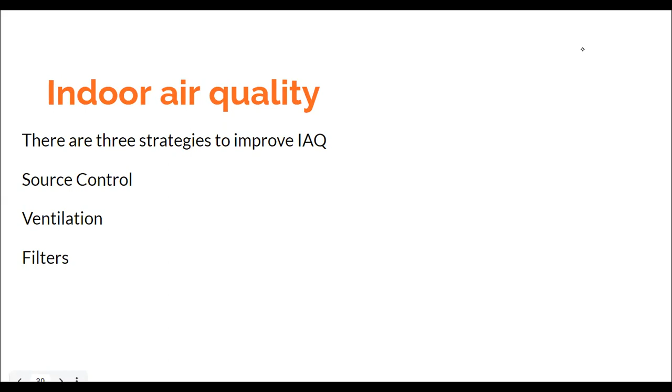So the major intervention in improving indoor air quality is what is known as source control. This is the most effective way to improve indoor air quality, and this is done by eliminating the individual sources of pollution or by reducing the emissions from those sources. For example, asbestos can be sealed or enclosed. And if there are some stores which emit gases, they could be simply shifted to some other place. So the sources are enclosed or separated from the other environment, and that does reduce the requirement of diluting the indoor air.

So the most important aspect in indoor air quality control is you need to identify the source of contamination and you need to control it so that the need for other methods of improving indoor air quality is minimized.

Some examples could be, for example, if there is a moisture source through roof leaks or there is rain penetrating through the leaky windows, and this kind of source control has to be done before attempting the other intervention method to improve the indoor air quality.

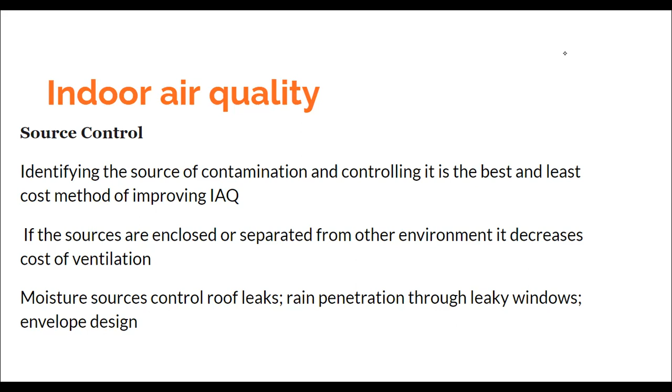Let us now discuss the other and the most important method for improving the indoor air quality, and that is ventilation. What is ventilation? Ventilation is the deliberate attempt to supply fresh outdoor air inside the room or inside the space whose quality is to be controlled. So the entire idea is to dilute the indoor air to a level of acceptable indoor air quality.

Now, what is the assumption in this? The assumption is that the outdoor air is more fresh, the outdoor air is less polluted, and when you send that outdoor air, the fresh air, inside the room, the quality of the room would increase. So this is the idea of diluting the indoor air.

This method, that is the indoor air quality control through minimum ventilation requirement, is recommended when there are mechanical systems like HVAC systems put in place, but it can also be utilized in some passive systems, like just by simply opening the doors and windows or having ventilators at your homes. Even if there is no HVAC system, one can make sure that there is improvement in the indoor air quality. But all this would depend upon the quality of the outdoor air.

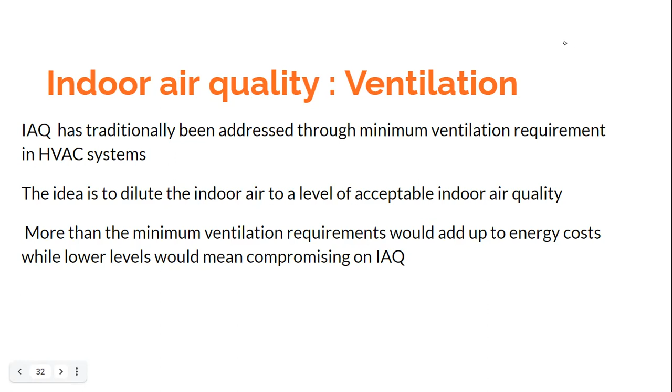So the optimum has to be worked out as to what is the ventilation requirement to make sure that the indoor air quality to the acceptable standards is maintained. Now, how do you get what the standard is, and how much is the minimum ventilation standard? For that, we need to refer to some professional organizational standards like ASHRAE standard 62.1. In the building codes, there is a table which lists the minimum ventilation standards.

ASHRAE standard 62.1 can be purchased from ASHRAE, and there are other standards which different countries, especially the HVAC professional organizations, adopt, and one can easily refer to those and decide upon the minimum ventilation standards so as to maintain the indoor air quality.

While this approach of keeping the ventilation standards to improve the indoor air quality is good, that is not enough. Both these methods, that is source control and minimum ventilation standards, are important, but they need to be complemented by what is known as the cleaning of the air by using filters. So filters are crucial to control the indoor air quality.

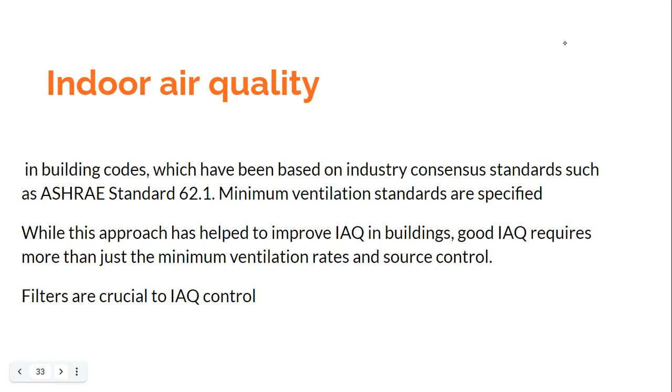As I said, the traditional means of dealing with the indoor air quality in HVAC systems is through ventilation with the outdoor air. And this approach assumes that the outside air is clean, it is not dirty. But if the outdoor air is dirty, if it's of poor quality, then insufficiently treated ventilation air actually would make the indoor air quality worse. So in that scenario, what needs to be done?

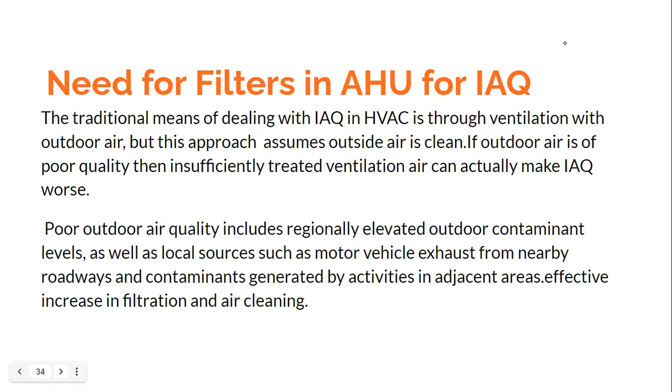And why is the outdoor air quality poor? The poor outdoor air quality is because of vehicular pollution. Internal combustion engines emit flue gases from the tailpipes, and that would cause the pollution, the contaminants. And then there could be some contaminants generated by activities in the adjacent areas. So what is needed is we need to have filters in the air handling units of HVAC systems for maintaining the indoor air quality.

Now, in order to know what are the best type of filters, we would be discussing the filters in quite detail, but this term we need to understand often comes very crucial. That term is the minimum efficiency reporting value, commonly known as MERV. M for minimum, E for efficiency, R for reporting, and V for value.

So what is this? This is a value which is used to describe the efficiency with which particulate filters remove particles of a specified size from an air stream. So in a way, it talks about the efficiency with which the filters remove the particulates. Higher the MERV value, better is the efficiency of removal of contaminants by the filter. So we need to go for higher values of MERV while choosing the filters if the contamination is more.

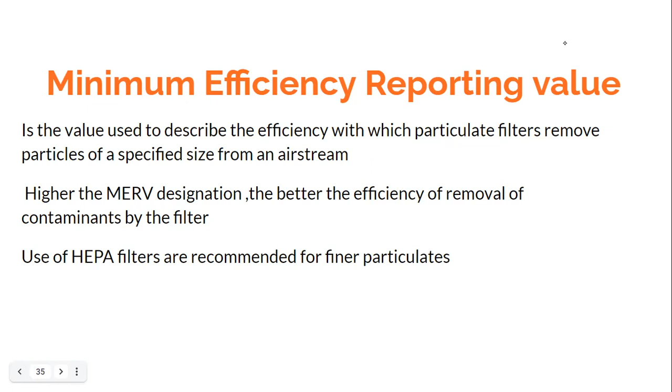For finer particles, one might go for HEPA filters. We had a discussion on the filters which are used in clean rooms, and the HEPA filters are one of the important filters which are used to maintain the indoor air quality.

These were the three methods. That is, you need to control the pollution at the source. Then we need to make sure that the ventilation is appropriate by seeing to it that the air changes are good. And the third we talked about is by use of filters.

Indoor air quality not considered during design and construction would cause many problems. So we need to incorporate the features of maintaining indoor air quality right from the design stage. Now, why is that so? Because the basic design decisions like site selection, orienting the building, locating the outdoor air intakes, designing the HVAC system and the ventilation, these are critical to maintain good indoor air quality.

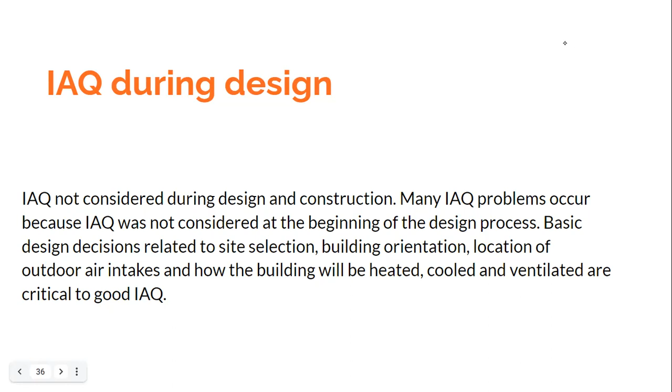If we take bad decisions regarding site selection or locating the outdoor air intakes, or by poorly designing the HVAC systems, then the indoor air quality would become costlier to maintain. It means that you need to put in more systems to clean the air, and that would be costlier. Not only the first cost would increase, but also the energy cost would increase.

Another important aspect regarding the indoor air quality is to make sure that the filters need to be operated and maintained efficiently. Because if you put the filters and the dirt accumulates, this dirt accumulation in the ventilation systems combined with poor management of water can lead to biological growth and serious indoor air quality problems.

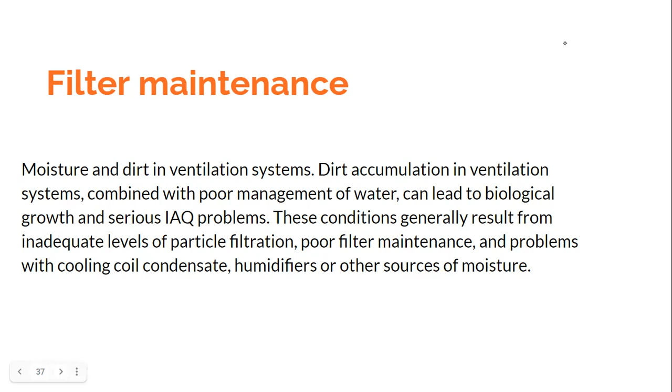These conditions generally result from inadequate levels of particulate filtration. This might happen because of poor filter maintenance, or problems with the cooling coil condensate, humidifiers or other sources of moisture. So moisture coupled with dirt becomes a dangerous combination, and we need to make sure that the filters are not clogged and are properly maintained so that the indoor air quality is at acceptable levels.

And finally, in the next class, we would be discussing a lot about what types of filters are to be used to get rid of contaminants. So these three important things, that is source control, making sure that the ventilation air is proper, and we would spend some time on how ventilation air is defined by air changes per hour, and then the types of filters, these three things would ensure that the indoor air quality is maintained in all applications, more so in critical applications like clean rooms.